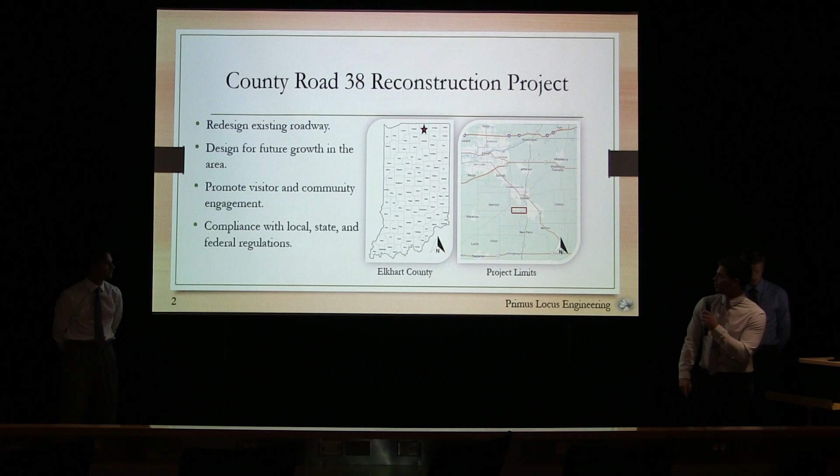Along with being project manager, I've also been assigned to lead the water resources department. As the water resources engineer, my two main scopes are to treat stormwater runoff and manage stormwater runoff.

To treat stormwater runoff, I will reduce the total phosphorus load by at least 65%. This can be done in a variety of ways, which will be explored through the three preliminary designs I will present today. I'll also manage stormwater runoff in an attempt to minimize runoff volume, infiltrating 1.25 inches of precipitation depth from impervious surfaces while improving overall water quality.

Lastly, I will design a flood control system to prevent flooding from the 100-year, 24-hour storm, and allow that floodwater to be contained instead of damaging surrounding areas.

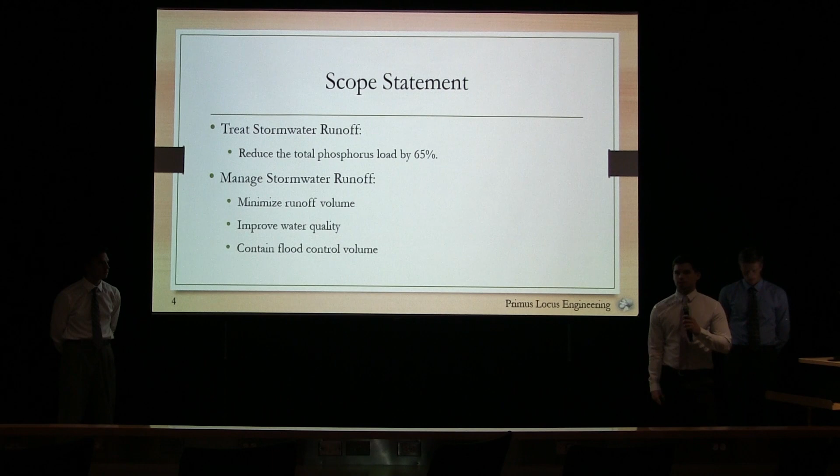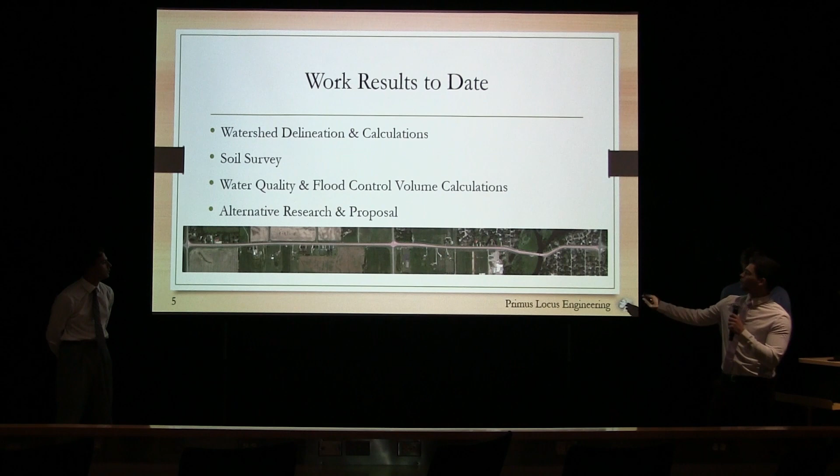So far for this project, I started by delineating my watershed and providing sufficient calculations. I decided to make it two separate watersheds: one starting west, moving east to the bridge, and the other east of the bridge to the end of the project limits at State Road 15. I chose two separate watersheds because of the topography of the project—water falling in the west watershed moves east towards the river, and water falling in the east watershed moves west towards the Elkhart River.

After completing the calculations, I found the west watershed to be about 17.2 acres and the east watershed to be about 3.4 acres.

Next, I got the soil survey for the project limits, which gave me the runoff coefficient, curve numbers, etc. Using these values along with the watershed calculations, I determined water quality volumes and flood control values. For the west watershed, I found a water quality volume of about 44,000 cubic feet, and for the east watershed, about 9,000 cubic feet.

Using the SCS method, I found a flood control volume of about 186,000 cubic feet for the west watershed, and about 47,000 cubic feet for the east watershed.

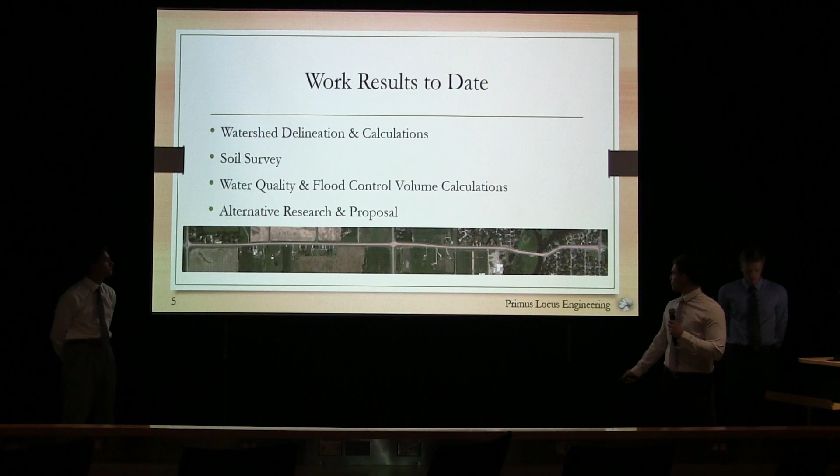These values will be used in determining the exact dimensions for the final alternative selected and all of the designs within it. However, they are subject to change due to the fact that the size of sidewalk, roadway, or building coverage could change in the future. Today I have brought three preliminary alternatives that we will go over.

For alternative one, starting west moving east, I decided to go with bioswales on the north and south end of the road. The bioswales will provide pre-treatment as the water moves east, eventually going through culverts, continuing through bioswales, and meeting at a third and final culvert where the north end connects to the south end.

This water will then be concentrated into further treatment in a rain garden. This rain garden will have an underdrain, allowing the water to go into a detention basin that will have an overflow to prevent flooding and allow that flood to go into the river instead of the neighboring houses.

Moving along to the visitor center, I decided to go with a storm sewer system. I've put in grass strips to allow pre-treatment for the water that will hit the parking lot. Once pre-treated, it will flow into the storm sewer system and exit into an infiltration basin.

This basin will have a specific type of media that I will have to do further research on to allow further treatment as it infiltrates into the ground.

Finally, moving to the east side of the bridge, I've gone with a curb and gutter system to allow the water to catch into the curb and gutters and catch basins and flow out to a hydrodynamic separator. The purpose of the hydrodynamic separator will be to remove the pollutants and sediments from the water and allow it to be pre-treated as it goes into the rain gardens and eventually treated to flow into the river.

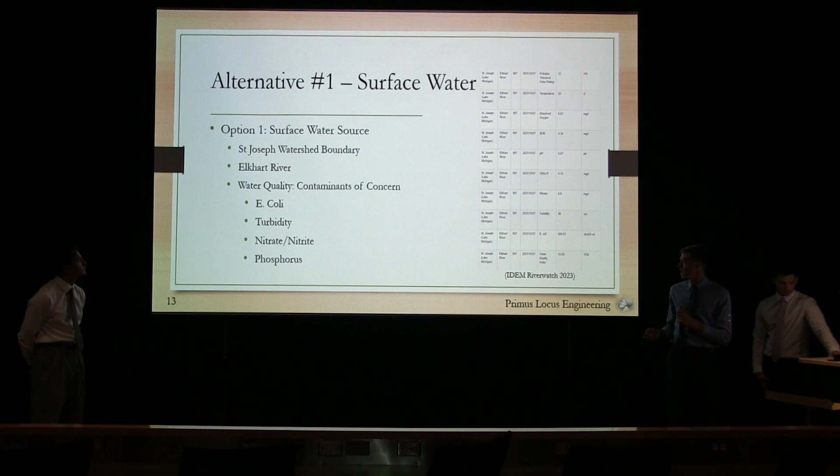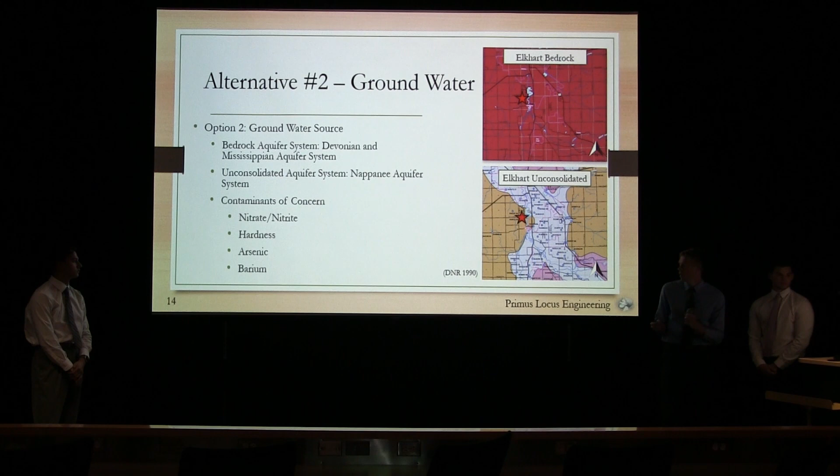The contaminants of concern, which were found using the Department of Natural Resources groundwater monitoring wells, were once again the nitrogen compounds, but then hardness, and then some heavy metals such as arsenic and barium. Arsenic being a big concern because it's a known carcinogen.

So these 2 alternatives displayed side by side. The left is the surface water treatment and the right is the groundwater treatment. They both follow somewhat similar treatment trains. The groundwater is more aimed towards reducing the hardness of the water, called softening. So the order and the parts are a little different between the 2.

The exact sizing of the components, as well as the exact location, is still to be determined, but close coordination with Sam and the Water Resources team will be necessary to make sure that any impermeable surface is treated for its runoff and phosphorus runoff.

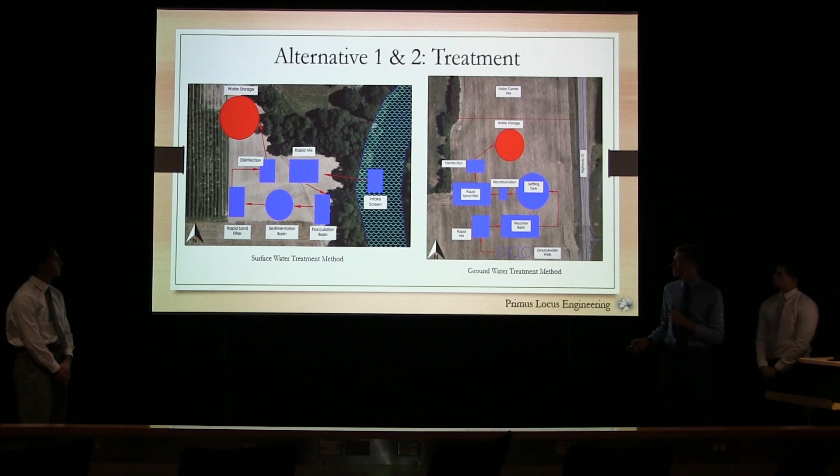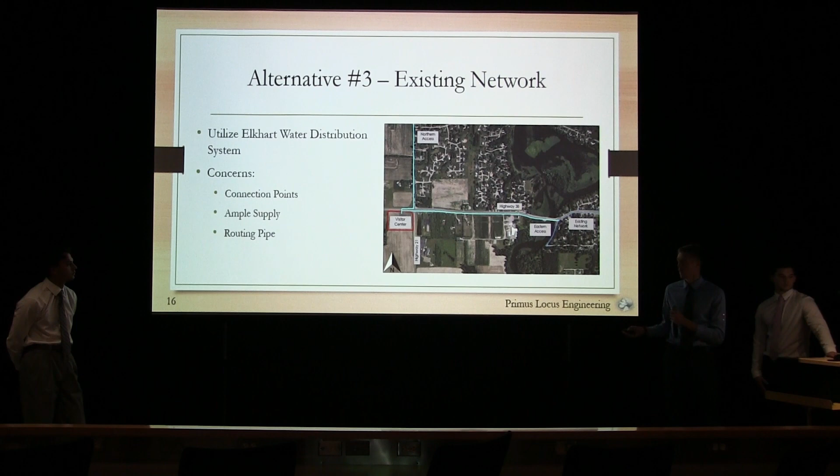The possible concerns with using the existing water main would be the connection points, being how feasible they are, the ample water supply, and then the routing of the pipe, whether it's enough or not.

So future plans include evaluating the more specific alternatives, such as the treatment components and water distribution methods, like the piping, and the cost estimate will be done for each method to ensure that the most efficient alternative is solidified.

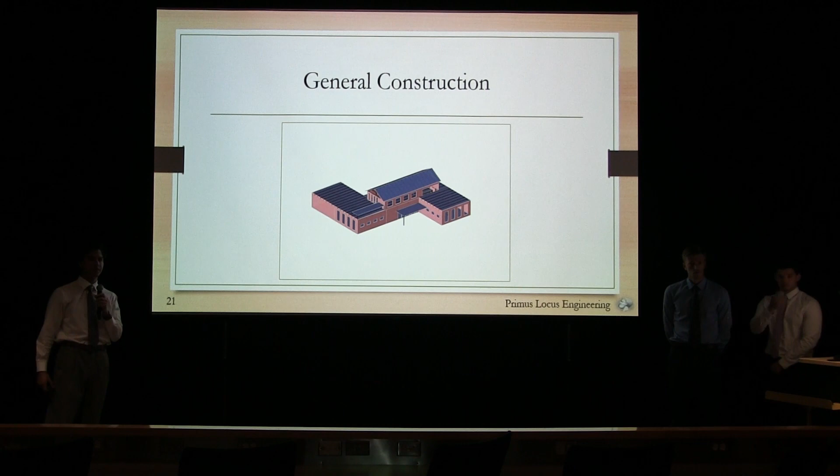So what we have is a 41,800 square foot building altogether, with 32,800 square feet of it being on the first floor, 9,000 square feet being on the second floor, and then 3,450 square feet of covered space, as you can see.

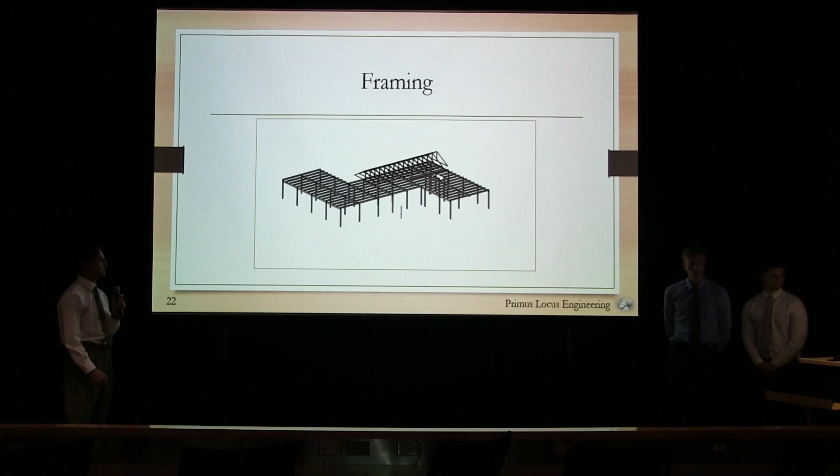From there, you have a museum that you can go to with either maybe the history of Elkhart or the history of native tribes that were in the area. You could also go to a gift shop and buy little knickknacks for your kids if you want.

And to be more useful, we also have a space for Elkhart County maintenance, for grounds crew or any landscapers, so they have a base to operate out of.

And on the second level, this is where the building really begins to shine, where we have our restaurant. Outside of that restaurant, you go to a patio where part of it is covered.

So, alternative 1 will be a fully framed steel structure. On the first and second floor, you'll see why I say that in the next alternatives.

We will have tapered steel columns, steel beams that will be supported by those columns, which will then support the roof and the second floor. And then we'll have steel paneling all the way around the exterior, which we would like to be insulated to help with cooling during the summer and heating during the winter.

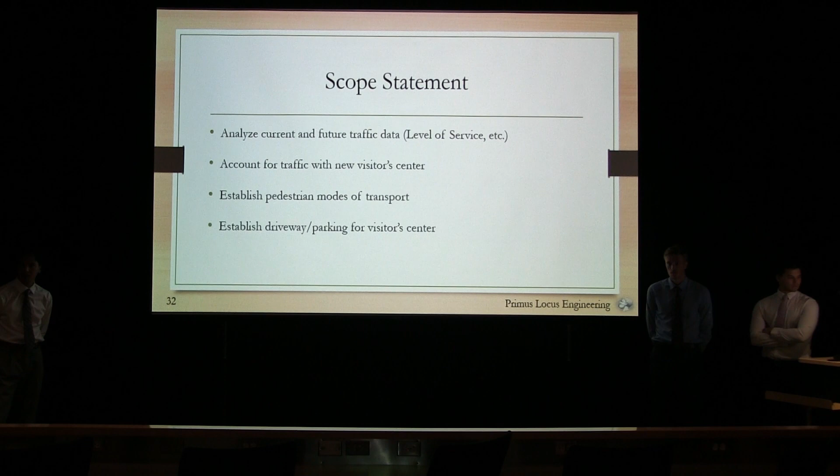I'm Vance with the Transportation Engineering Department for PLE, and this is my scope for the project. My current scope is to analyze the current traffic data and also future traffic data, because it's likely going to grow in the future at some point. We also need to account for new traffic created with the visitor center, and we also need to establish pedestrian modes of transportation. The county we are working with looks to move towards non-motorized uses of transportation, so we look to find areas for that to be implemented. We also plan to establish driveway and parking requirements for our new visitor center.

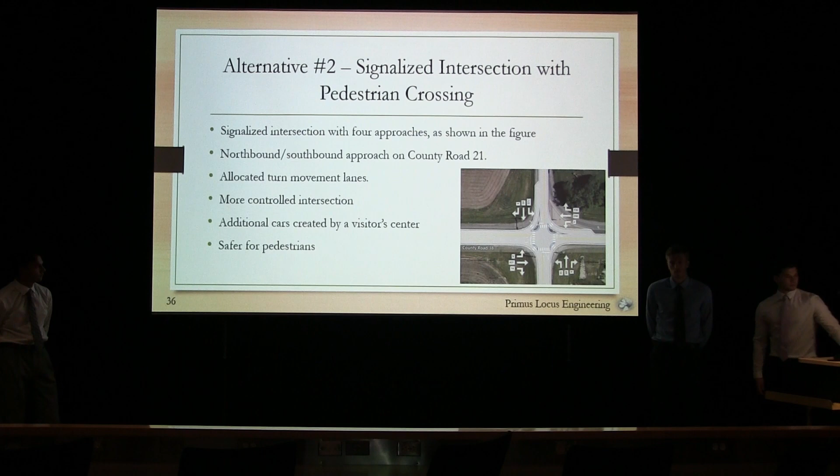This is a zoomed in visual of the second alternative.

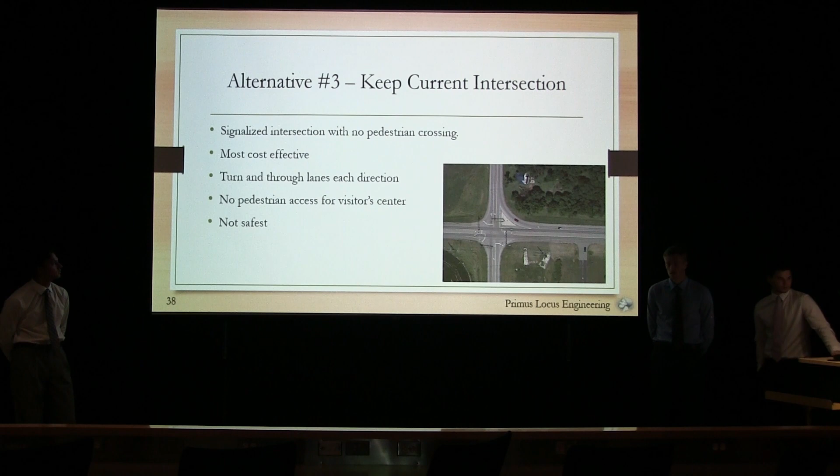And this is just a zoomed in visual of this alternative.

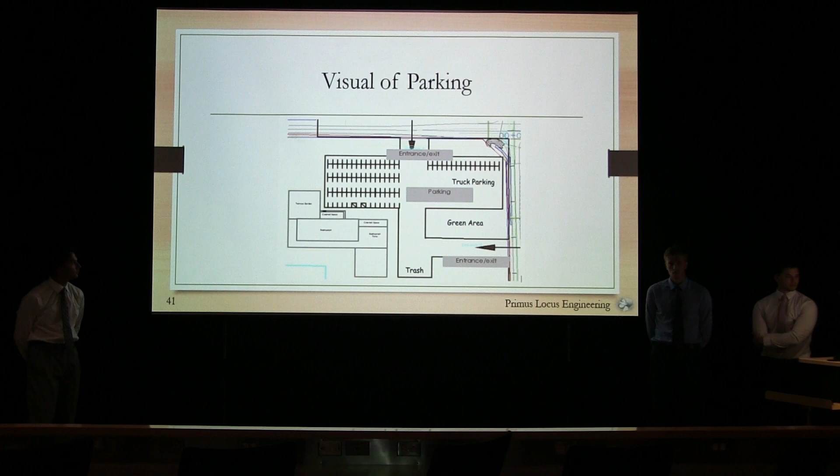My future plans are to complete the traffic impact analysis. I also plan to finish remaining calculations for level of service, determine specifications for a multi-use path, and establish driveway requirements for the visitor center entrances and exits. Thank you for your time.

Do you have any questions?

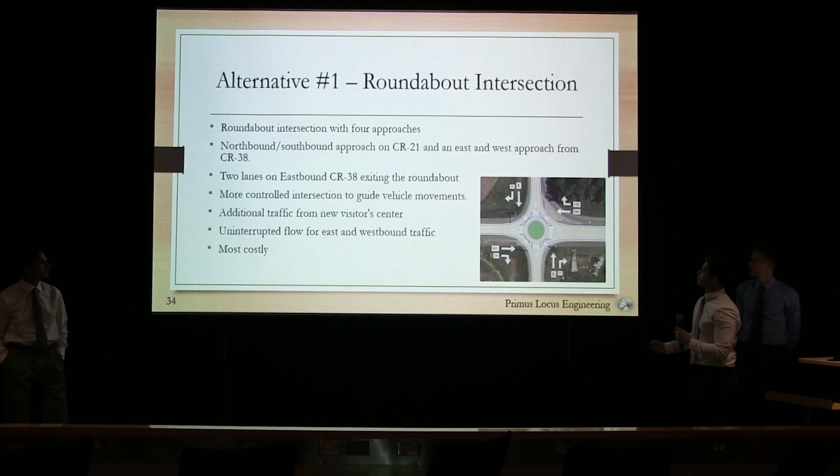So I have a couple questions that are pretty general, to give some insight. You have the hydro treatment kind of facility for the water side—can you talk about the scale of that, when you're bringing the water in, on the water resources side? Yeah, so you have the system going in, I didn't know if it was hydro or something. Oh, the hydrodynamic separator? Yeah, so what scale is that—like what does one of those look like as far as putting one in? Is it a small footprint or not?

There's enough space here. When I was doing my research on it, I saw different sizes for it, so depending on the amount of water that has to be intaked, I can determine that. It'll take in that water in a cyclonic motion and remove the sediment and pollutants, allowing the other water to go through as pre-treatment to the rain gardens. But the size determination will be based off the amount of water it has to take in.

Would that be like an above-ground building, with the pipes and things, or would it be below ground? It'll be below ground.

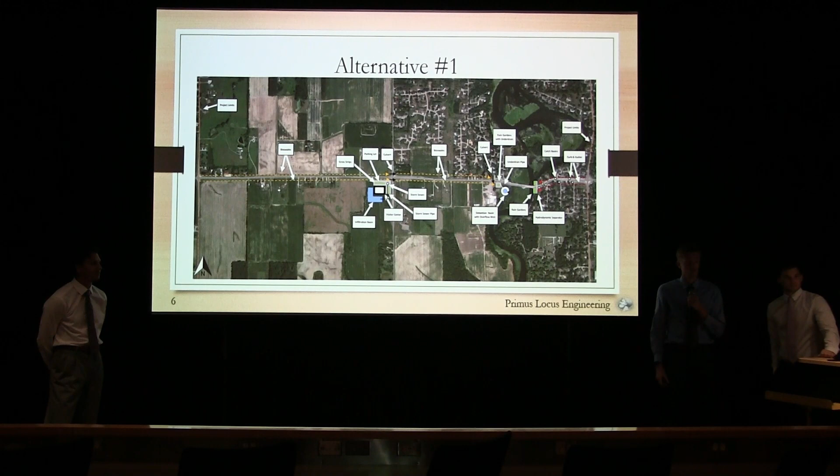All right, thank you. As long as you're holding the microphone, could you go to that slide that talks about the peak hourly and peak daily numbers that you calculated? Absolutely.

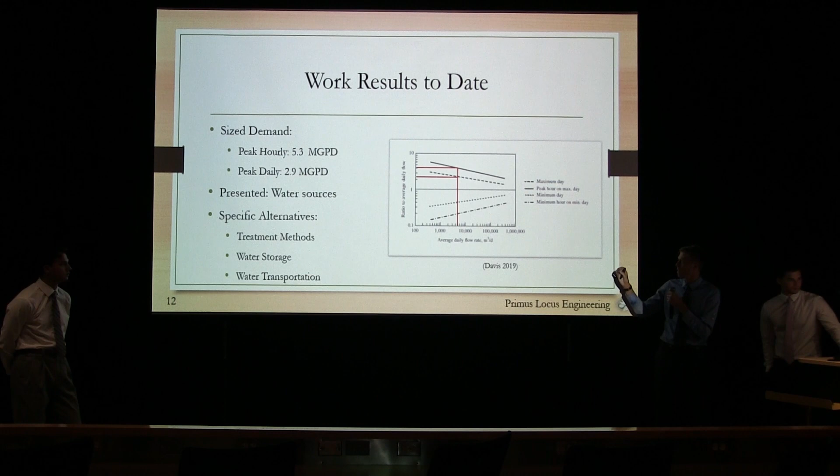So using that 1 million gallons per day, which falls into 3,800 cubic meters per day, the graph provides the peak hourly and peak daily. So those are just used for the design of the treatment components. Does that answer your question?

I'm a little bit confused on how a peak hourly rate is measured in million gallons per day. Yeah, so if the flow rate was measured at heavy usage time, like 8 p.m. when people are home, if that were to be sustained for the whole day, then it would be closer to the 5.3 million gallons. Now I get it, thank you.

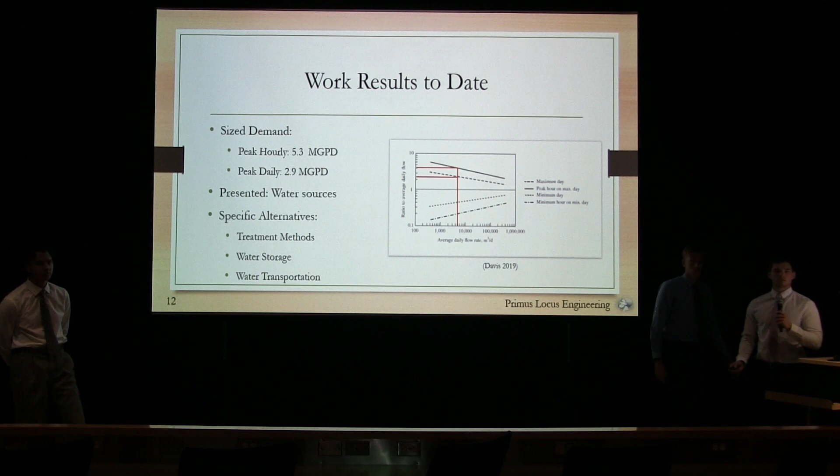Dr. Weiss? So I have a question for Sam. So, first of all, thank you for going first. For some reason, students always seem to put the water resources at the end. And from someone with a last name that begins with a W, thank you for allowing me to go first at least once in my life, if only indirectly.

But could you tell, in some of your alternatives, you had the bioswales and a drainage ditch. Can you explain what the difference is? Because that kind of sounds the same.

Yeah, so the roadside ditch here and the bioswale. I guess I'll start with the bioswale. It's basically what you would imagine with the roadside ditch, but here it would be like a vegetative swale that would use specific vegetative plants to help pre-treat for the phosphorus I need to reduce, for the water quality. The roadside ditch, I was researching, would be cheaper per linear foot than a bioswale, and it would kind of just bring the water to it. I'm not necessarily going to count that as a pre-treatment for the area treating for phosphorus, but the bioswale will be counted towards treating that amount.

So is the difference just the plants and vegetation there, or is it the shape of the cross section, or what's the difference? Mainly the vegetation, the plants and things that consist of it. I haven't looked into the dimensions quite yet because I wanted to solidify more of the calculations I have to do, like the water quality volume and flood control volume I talked about.

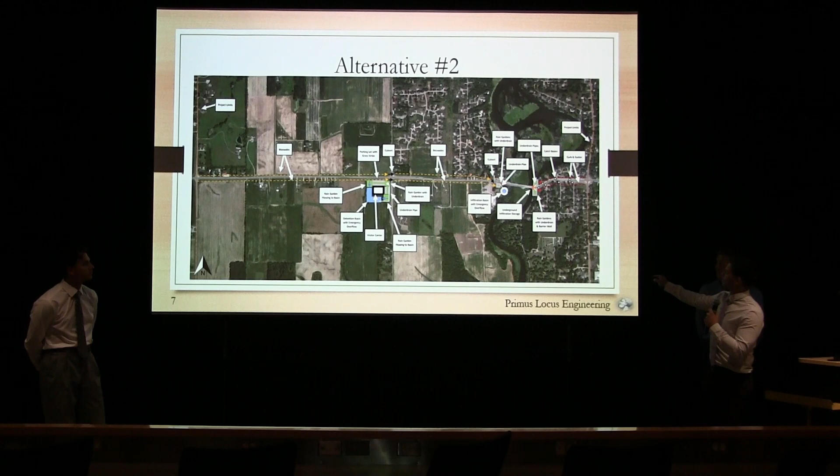And I wanted to run this water and just concentrate it all, since it was pre-treated together, instead of running it into the river, because there are regulations about the flow rate going into the river, so it needs to be slowed down and things like that.

So the culvert here will bring it from the north end to the south end.

Again, you need to calculate the numbers and all that, but my concern is that culvert might be pretty big.

And then you need to make sure you have room under the roadway and above the outlet. You may need more than one, is what I'm saying, or two.

I have not. If it ends up the volume of water requires a 4-foot diameter pipe, well, do you have enough gradient to get that where you need to go?

That's a good point, and I have to look more into the size of that culvert to see if it would even be an efficient alternative.

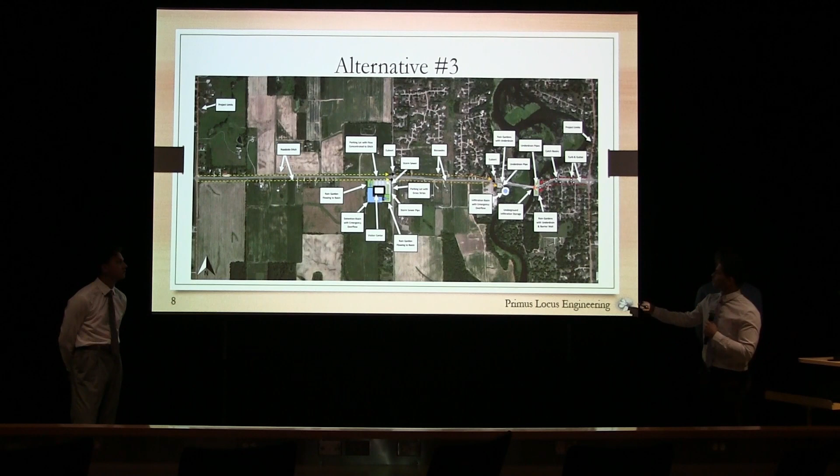So that will be something to do for all three of these alternatives, to narrow down any errors I've made and make sure the final alternative will be sufficient.

I saw a green roof somewhere on a structural slide. So is somebody gonna design the green roof? And would that be the water resources person or the structural person?

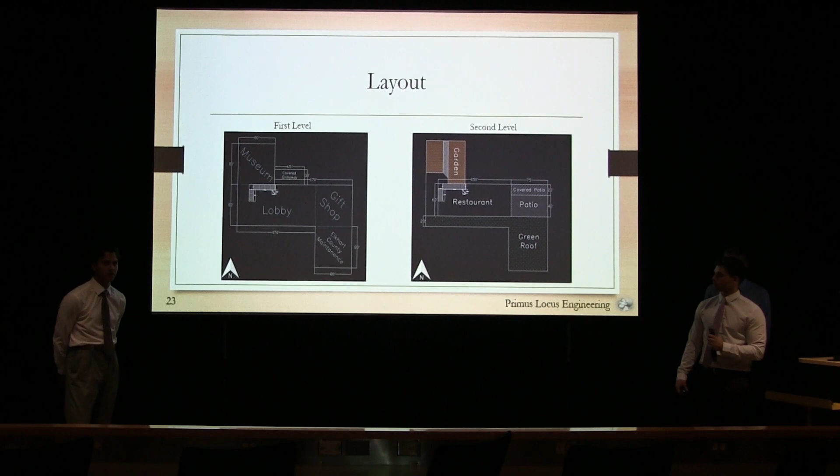So we're going to coordinate that later on as to what the infiltration rate will be for that. But I will go ahead and design that just so I can get the loading for whatever members are going to be supporting that. And then from that, Sam will take that infiltration rate into account.